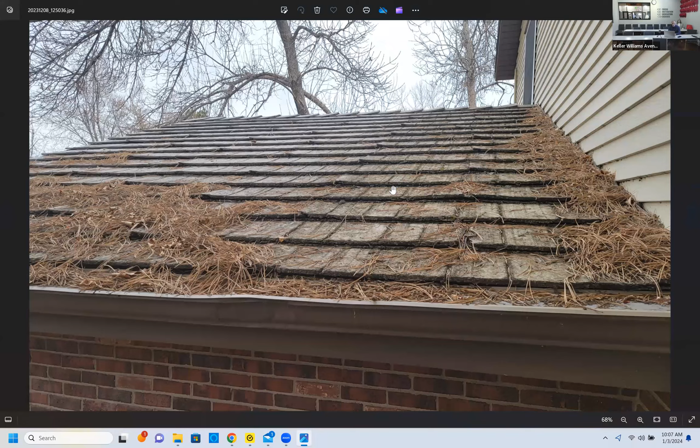This next roofing is actually on a house I'm going to be listing, and it's a type you don't typically see much anymore. It's called Woodruf shingles, and there was a class action lawsuit on this type of roofing years ago. It's a man-made kind of fiber that looks like a wood shake shingle, but you can see moss growing out of it and it's delaminating. It's pretty ugly. This house is going to be sold as is, it's an estate sale, and they didn't do hardly anything to it. You can see the grooves in the shingle, which shows it's a man-made type, not real wood, and it's much more regimented in how it's put on the roof, whereas a real shake shingle is staggered and curling up. This roof is probably 30 years old, if not more.

Hey Bob, would a roofer charge more to remove those two types of roofing than they would a regular shake? Yep, asphalt or shake, absolutely. I don't know what they charge per square, like 10 by 10 feet, but it's definitely more because it's more laborious to take that roofing off, or if there are multiple layers. Shake is always more expensive to take off because there are nails all over the place. On a roof this old, they'll probably have to take it down to the wood and put on new felting, which is the black asphalt roll you see on roofs before shingles go on. But it's definitely seen its day.

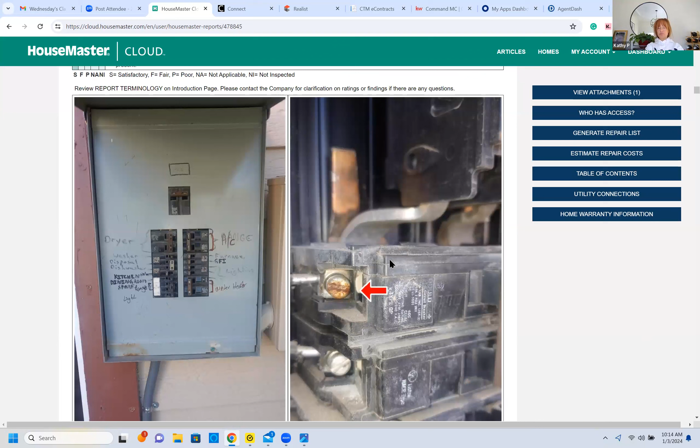I just got a quote on, I guess it's about a 1,500 square foot home, and it was $4,300.

Okay, 43. Hey Bob, would they necessarily replace the whole outside case if they were redoing these, or would they just do the breakers? Can they do just the breakers?

No, they have to do the entire panel. And sometimes they have to put in a new mast.

The mast is the pole up on top that brings the wires. If there's poles bringing the electricity in from a high power line, the mast has to be a certain height up off the ground. In older homes, you'll even find it came in under the roofing, under the eaves of the roof. But it should be a certain height so people can't jump up and grab the line. So yeah, they don't just replace breakers, they replace the whole panel.

And it's a good idea, if you have a 50 or 60 year old panel, you might as well get everything updated and know it's safe.

Now, in this particular one, one thing we did ask for is there was some rust on this breaker, which could cause it to not trip correctly. So we asked an electrician to go through the breakers and make sure everything was functional and replace anything that needed to be, and they replaced 3 of the breakers.

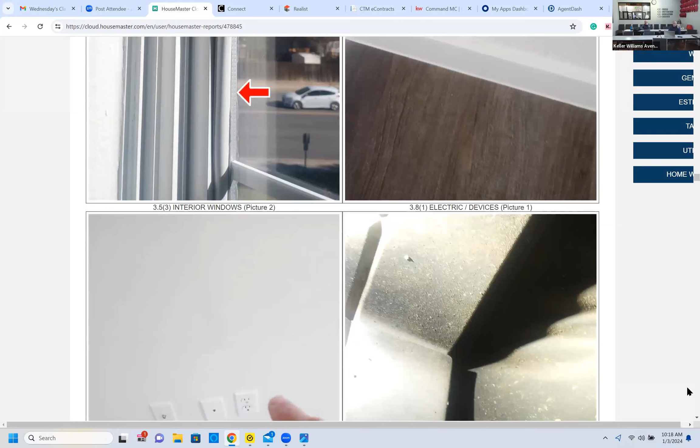Do you know if they allow the GFCI in series? If they're set up in series, does it require not every plug to trip, even though it's in a series? I think it's different with different municipalities, but usually they are in series. Sometimes what's weird about GFCIs is you may have one in the kitchen, and if it trips, it may also trip another one upstairs. I've seen that—I was just in a kitchen where there was one at the end, but it tripped the entire circuit. Yeah, I don't think it's necessarily supposed to, but it can happen, and whether that's okay just depends on the city. Everybody has their own thoughts on that—most electricians will say no, they don't want it tripping the whole thing.

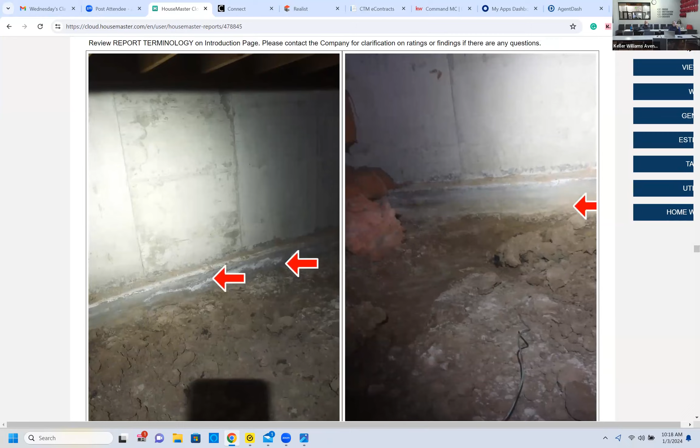This is down in a crawl space, which most of us never see even when we're showing a house. But for your knowledge, if you're in a basement that doesn't have dirt but concrete, and you see this white powdery substance, that's called efflorescence. Efflorescence is caused when moisture breaks down the minerals in the concrete from being moist most of the time. You can see some efflorescence out here in the dirt too. This is pretty common—a lot of times crawl spaces aren't sufficiently dried out and don't have visqueen or plastic down on top of the dirt.

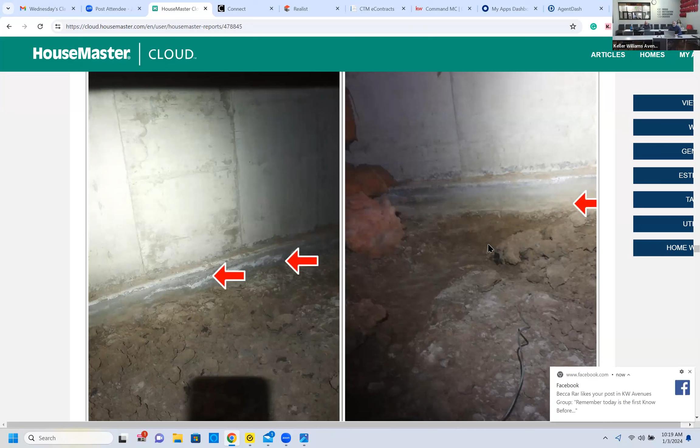So that was one thing they asked for, and the seller did it. The seller was actually an investor, and he was pretty nice about fixing the numerous items we had. There weren't a lot, but yeah, he was good about it.

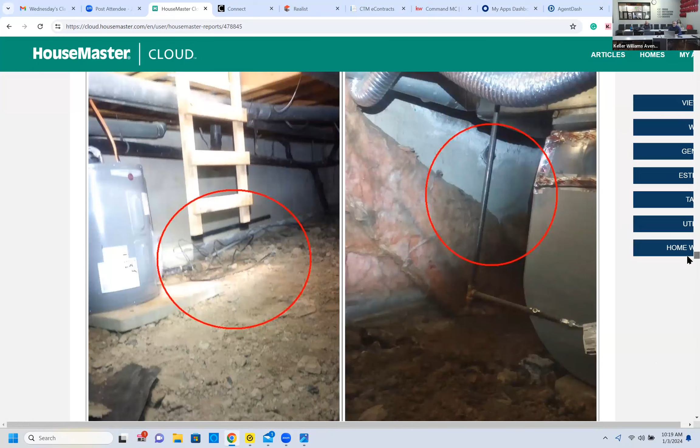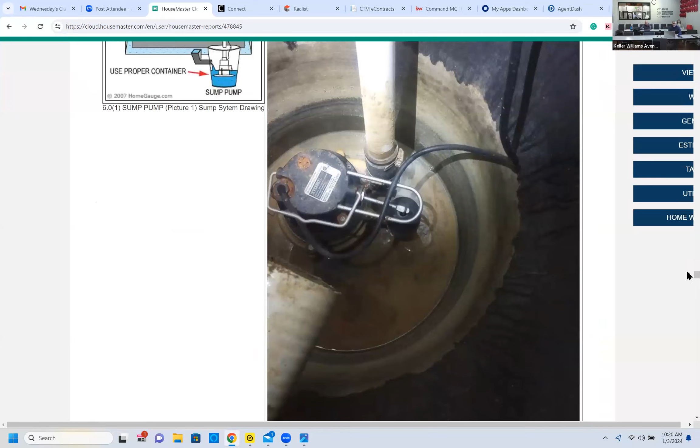We also had a break in the main water line out here that they didn't realize was dripping water—you can kind of see it looks a little different there because it had probably been dripping for a long time. There was also a broken switch going down into the crawl space, not a big deal. Like I said, these are often things you're not going to see because you don't typically go down into the crawl space, do you, Valerie?

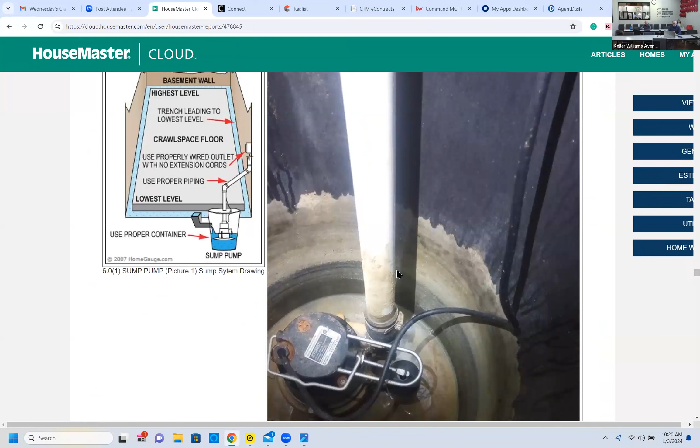No, I don't. So here is a sump pump, or sump pit. What this does is—you have a French drain that goes clear around the whole exterior of the foundation, and it drains towards this pit. If there's a typical amount of moisture that builds up every so often, this pump, which works kind of like a toilet valve, kicks in. Once the water reaches a certain level, it trips the pump, the pump turns on, and then it pumps the water outside.

This line goes up and exits somewhere out the house. Once in a while, you'll find in these sump pits that the seller or somebody has plumbed this exiting water into the water system, which is totally illegal. You can't have this pipe drain into the water system and exit from there, because they don't want this water getting into the public water. It just goes up and outside and exits somewhere, okay?

And if you do have radon, they will oftentimes use this pit, and they'll maybe drill another hole in here and put the pipe down in there and have it go down into the ground for radon mitigation.

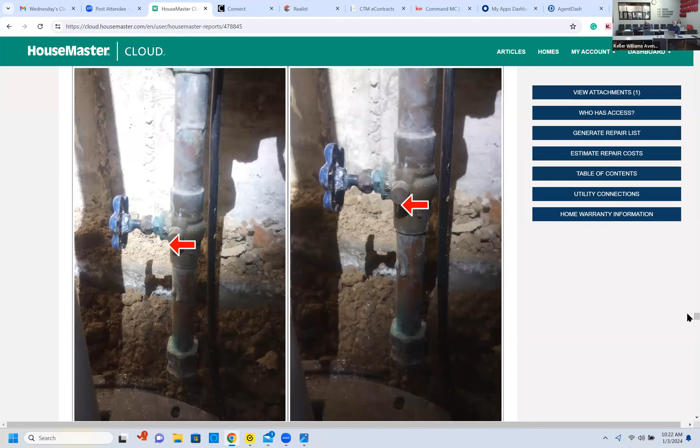The water heater was fine. There were a few connections. This was not connected the way it was supposed to be, which you're not gonna see in a crawl space, but you will in a basement. There was a leak here, which is common. If nothing else, you guys learn a lot of things by going to these inspections and just listening.

Let's see what else we got. I think that's pretty much it.

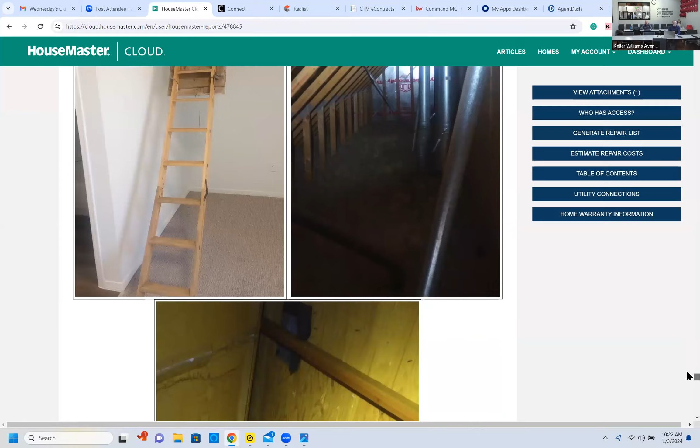Sometimes you might see in a house an open stairway where you can pull down a string and open up the attic access. This is in a two-story condo, which is kind of unusual, but they have the access there. You could actually see the whole area up there. A lot of people say, well, can I store a bunch of stuff up there? You really shouldn't be storing anything heavy. You could put maybe a piece of plywood down on top of the insulation and some light Christmas decorations or whatever, but you don't want to put a bunch of heavy weight on top of the trusses. That's kind of a different thing you don't typically see.

But of course, the inspector will check up in the attic, make sure the insulation depth is good, and make sure there's not been any intrusion by animals, because every so often a raccoon or squirrels get in there and raise havoc.

I once had a house I did in Aurora. We had, we figured somewhere around 15 raccoons that were living up there. And when the inspector opened it up, he about came off his ladder because they came charging at him, which is not fun.

This is a condo sold this year up in Fort Collins. Didn't have a lot of issues, but this is a typical panel inside a condo. It's typically a little smaller. This was not a bad panel. He took a picture of it, and a picture inside the wire. You'll see the name of this panel is Square D, a very good manufacturer of panels. You'll see Square D oftentimes now, as a lot of builders are using Square D panels, so it's a good one. Federal Pacific and Zinsco, again, are not so good.

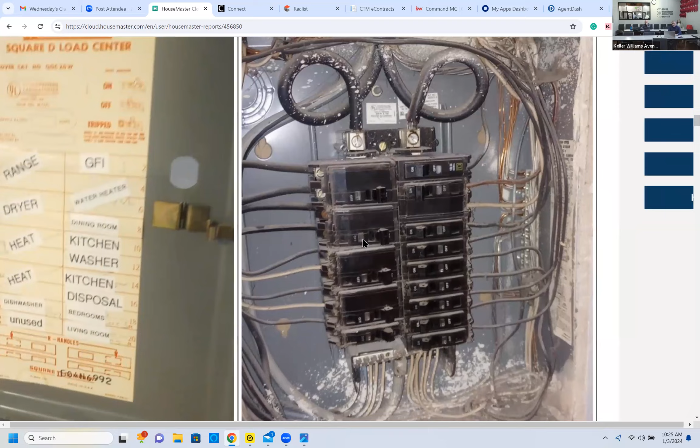So this is typical of what a good panel will look like inside. This is just some excess paint or spackling from when they did it. But you'll notice that the wires are not bent and they're not at a sharp angle, they're kind of looped. A good panel will have more of a curve to the wires when they come in. They try not to bend them at a 90-degree angle, but that's a good panel. You're not going to see that when you show a house because you don't take off the cover, obviously.

This condo did have GFCIs. Actually, this was a very good little unit. Really nothing other than something that's common: when people paint, when they hire somebody, they don't cover the alarms and they'll just spray paint over them, or texture over them. And immediately there's moisture in there and they're not going to function correctly.

So if you're showing houses and you see that - I showed a house a couple months ago in Littleton, 950,000, it was a fix and flip, and every single one of the smoke alarms and CO alarms were spray painted. Which is just unbelievable to me. They probably put 150,000 into the house and didn't do anything about putting in new smoke detector alarms, and people still bought it.

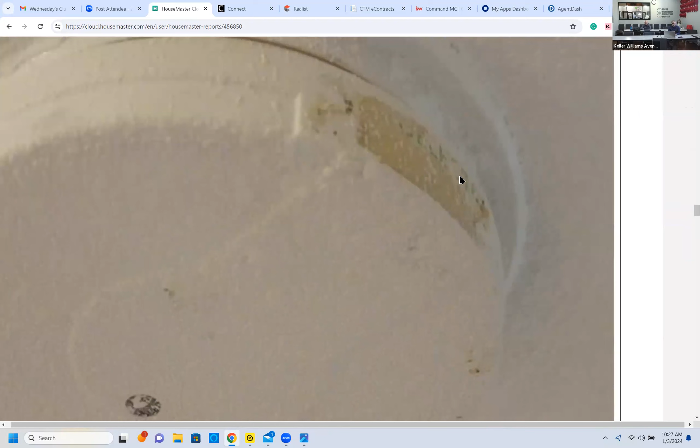Another thing to note when you're walking through - have you ever noticed that the alarms are maybe yellowish in color? That's a very good indication that they're older. You can kind of see in this one, where they didn't spray paint, it's a little bit yellowish looking, and this is an older alarm. So my people were just glad to get this one, and they said we'll put in new alarms and do everything. The only thing they asked for was a credit on the fireplace.

So when you have a wood burning fireplace, a lot of times you want to make darn sure that they do inspect the fireplace, and you may want to hire separately from the inspector - you may want to hire a chimney sweep or a company that looks at the flue and makes sure everything is solid up through there. I know up in Evergreen, like where Valerie is, there's a lot of fireplaces, and you really want to make sure if people are using the fireplaces a lot, that you get it looked at. They can put cameras down in the chimney and inspect them and make sure you have a safe fireplace.

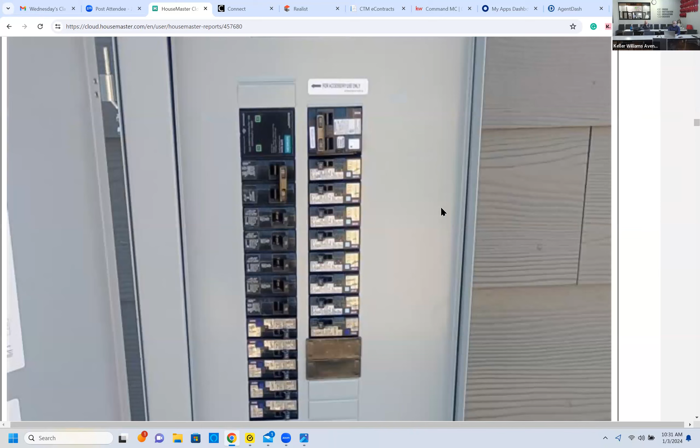There's a newer panel, obviously brand new, much larger. And when you get into newer homes, you'll see they not only have breakers, they also have these little switches for arc fault. So in bedrooms, and now pretty much every room, they have arc fault breakers, which means if something just sparks in an outlet, it will trip the breaker. A normal breaker wouldn't trip from a little bit of a shock inside a pan, plug, or light switch, but with the arc fault, it will trip and shut it down immediately.

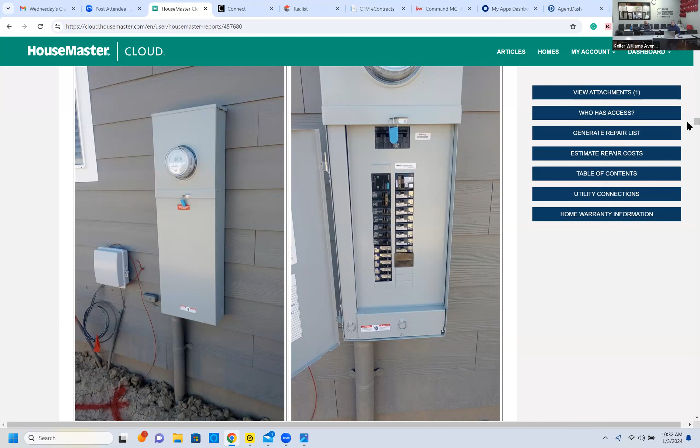It used to be that was only required in bedrooms, now it's pretty much every room. It's a total pain in the butt. Why? Do you have a problem? Like a vacuum cleaner or blender, you name it, it'll set them off. Maybe you're just using too much electricity.

There was a light switch that wasn't working correctly, so they replaced it. Like I said, I think there were 8 things he found with this home that we probably wouldn't have found had we not had an inspection, if we'd just done a walkthrough.

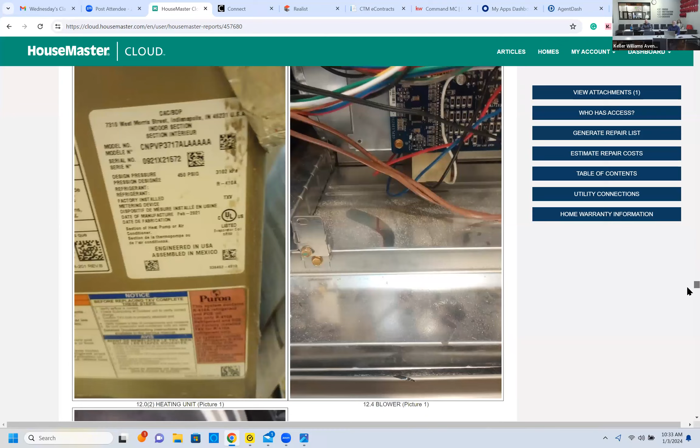But it's also good for the buyer because they have this inspection report they can go back to. The inspector explains things to them, and then they get explanation a second time from the builder when they do their walkthrough prior to closing, typically a week before. It just shows everything and gives them good information.

Okay, let's go to another one. Any questions on anything so far, you guys? No? Is that because I'm doing a great job, or because you already know it all? You know it all, come on.

Let's go. Oh, this will be a good one, because my people actually backed out of this one, and I'll show you the main reason why. My old partner used to live in this patio home right next door, so he thought it was interesting that I was showing and had this place under contract, but like I said, we didn't go through with it.

These have roof tiles on them. This is an older patio home complex right over by Indian Tree Golf Course, around 78th and Wadsworth on the west side. But the roofing looks pretty good.

This is something you guys should notice when showing or listing a house: these old-fashioned splash blocks are pretty much worthless, and most people don't even have them positioned so that water from the downspout hits and gets exited out. These are typically only about 3 feet long. This needs to be like a 6-foot extension to get it away from the edge of the house. Sometimes people will try to trick you and put on extensions right before they list the house, but you'll see sunken soils all the way around and know they've had nothing there, or just one of these splash blocks, for many years, especially in older homes. You don't find these anymore.

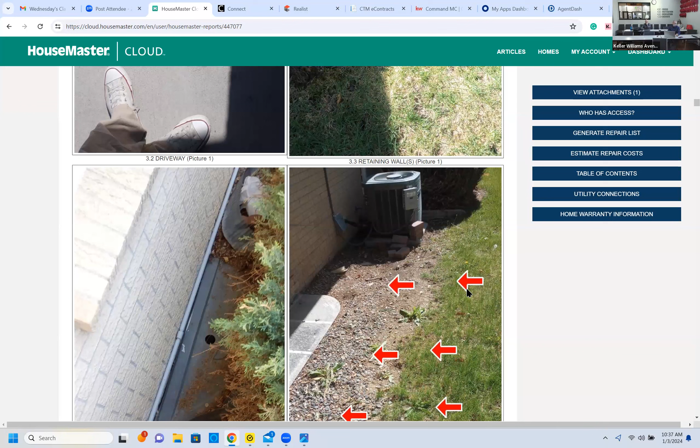In a good market or a strong seller's market, if you ask the seller to make this a positive grade, they'll tell you no. It's something I point out to buyers when showing a house, that this is probably something they'll want to fix. You want roughly 1 inch of grade for every 2 feet or so, just so the water flows away. With new homes now, they always build so there's positive drainage away from the foundation, and you can't interrupt that drainage at all or you'll void your warranty on the foundation.

Somewhat of a newer panel, I can't remember. No, this was not newer, but it's a General Electric. It's a big panel, and you can see that the wiring was all pretty good.

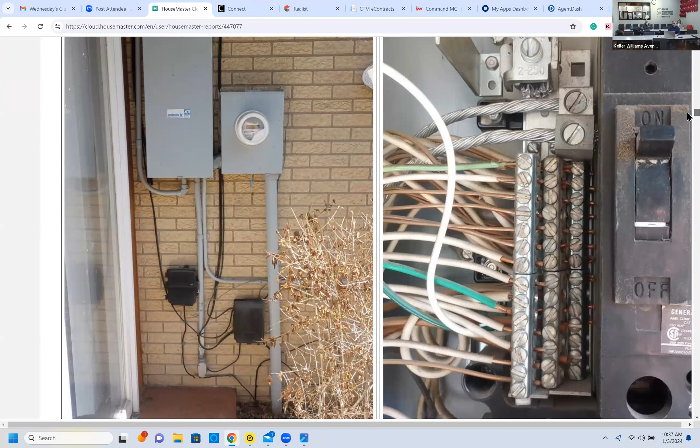Nothing they call double tap. Once in a while, your inspector will see maybe two wires come into the same screw, and that's called double tapping. But you're not going to see that unless you open up the panel, which I wouldn't suggest you do when you're looking at houses, because you don't want to cause any problems.

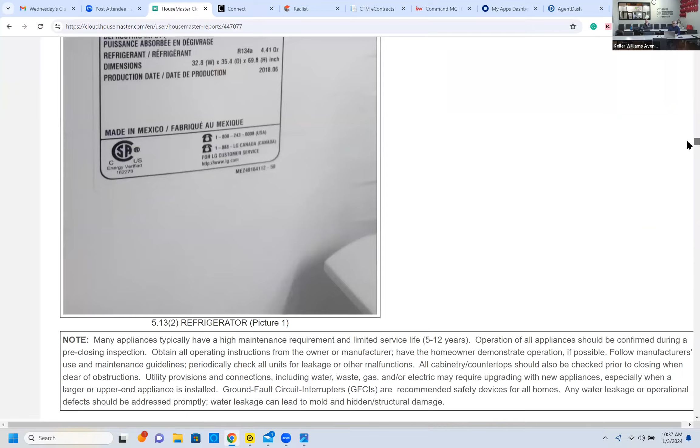Let's go further down here, let's see. It's coming, I know it is.

Nothing wrong there. Okay, this was a problem. This is why my buyer just got out of the deal. This is a support beam—you can see this big beam here, and this support beam underneath it is crooked. And we plumbed it, and it's that much off. That's two inches; they allow up to a half inch. This was quite a bit, and you could not see the other two beams in the house, but chances are they were off too.

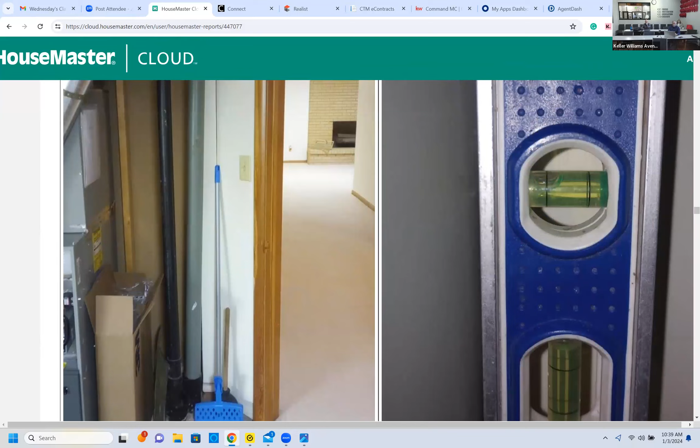Now, do I think that was a big deal? Somewhat, because yes, it's crooked, and this beam is not straight up and down like it should be. They were not comfortable with it. They did not even want to pursue having the seller try to remediate that, which they probably wouldn't have. But that was their just cause to get out of the contract, and they did.

Which some people say is silly. They didn't feel it was silly. I talked to my structural engineer, sent him the photos, and he said it's definitely a problem and you'd probably want to get that fixed over a period of time if they didn't fix it. He said it could run anywhere from $3,000 to $10,000 to get that taken care of. So just another thing—in the 30-plus years I've done this, that's the first time I've seen these support poles

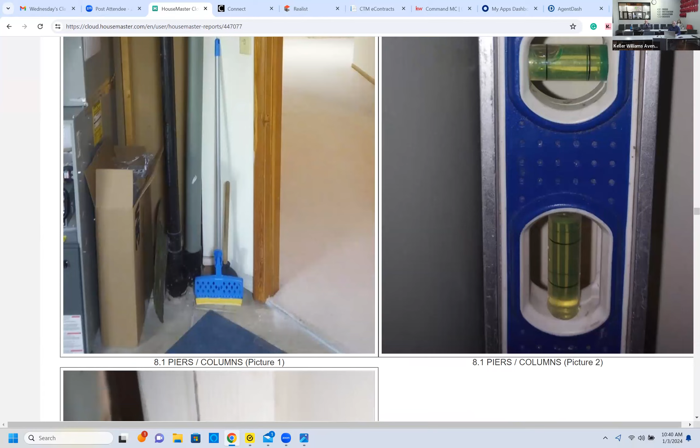that far off. What do they have to do to fix that? I don't know exactly—you'd probably have to take that pole out and reinsert it, and that's going to take some work. It depends on how far off, because there's another pole, or two, on the other side of this picture, and one more we couldn't see behind us. So it's just according.

Something to notice when you're looking at a house—this is a good idea just for around your own house too. Do you know what this is on a hot water heater? It's a pressure relief valve.

There should be either a copper or plastic pipe down within an inch or so of the ground. What this is for is if enough pressure builds up in the hot water heater that it has to release, it will release scalding hot water out of there. Once in a while you'll see them without these pipes on there.

And if you happen to be in the wrong place at the wrong time, that will burn the hell out of you. This little valve here you can lift up to release the pressure, but what it should allow is that if something comes out, it just exits down, and it should be next to a drain down in the basement floor, which this was.

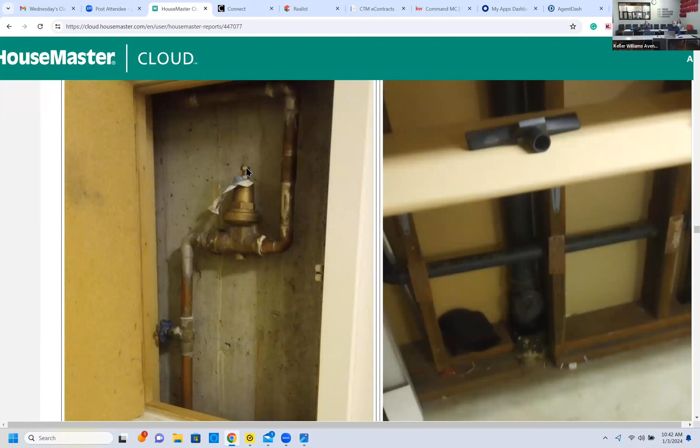This is your leaded pipe for gas. This is your shut off here for the gas, notice it's in line. They're going to look at all these connections in an inspection and make sure they're legal to use. Sometimes people put in stuff they shouldn't be using because they do the plumbing themselves—copper pipe, yes, but sometimes they'll put in plastic. This is your main shut off, and this is your pressure valve inside the house.

In older homes, you're going to find, like this one, that they didn't always float the walls on the concrete floor. This part is floated a little bit—by floating, I mean they have a 2x4 or 2x6 elevated off the ground, with another one above it. The reason they build walls that way is so the ground can shift some without pushing on that 2x4 and pushing the walls upstairs.

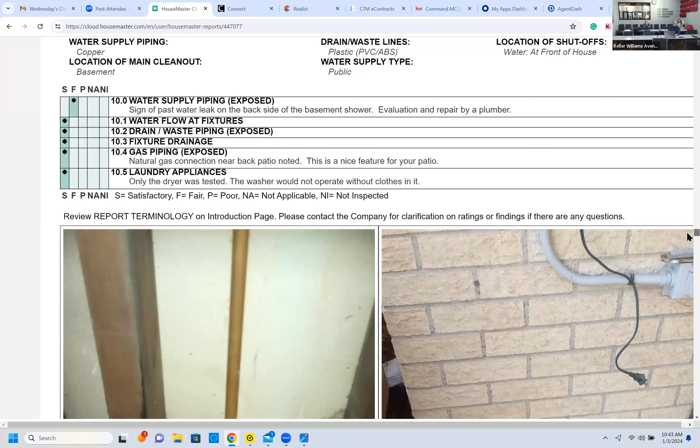In older homes, even though they didn't do a soil sample for every single lot, they poured concrete and were very good at what they did. Even the old Perl-Mack homes up in Northglenn or South Glen, they did a great job typically pouring concrete and not having issues with moving soils like they do nowadays. We're building in areas, especially along 470 on the east and west side down towards Ken Caryl, where there's some really bad soils, and other areas right around our office here.

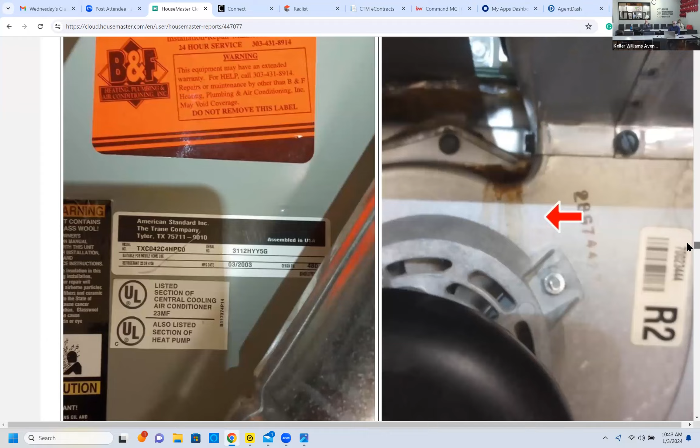Newer furnace. A little bit of rust showed up there, not a big deal, but they're going to point out everything to you.

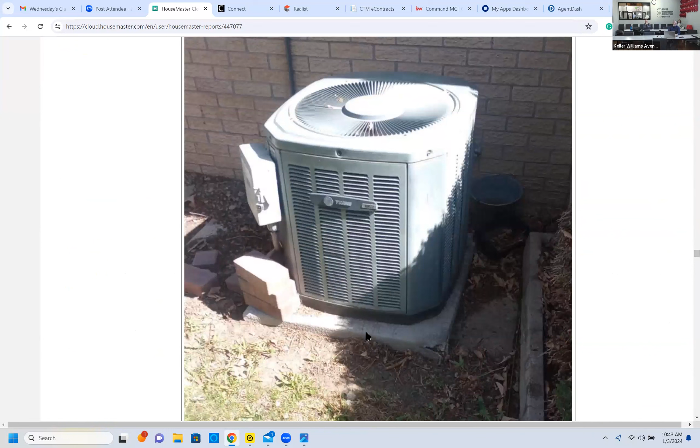Your air conditioner should be on some kind of level ground, or should have something like this, I think it's made out of fiberglass, that you typically set the air conditioner on. I've seen air conditioners tilted at like a 30-degree angle, which obviously isn't going to allow it to operate in an efficient manner, to say the least. So it's just something you look at.

Then you can look at the floors and make sure everything is looking good. One thing an inspector is always going to verify, and I don't think they have a picture here.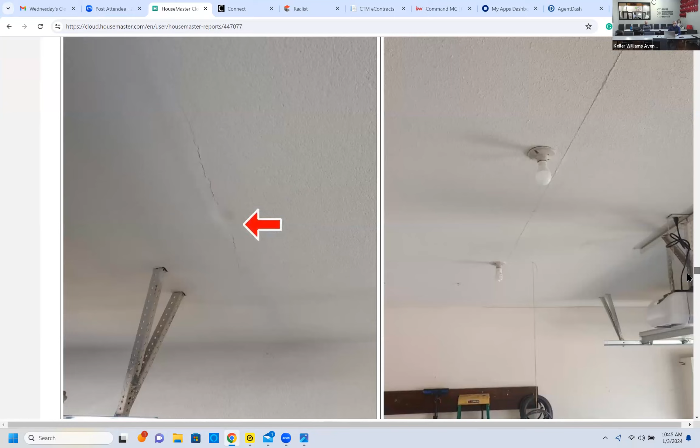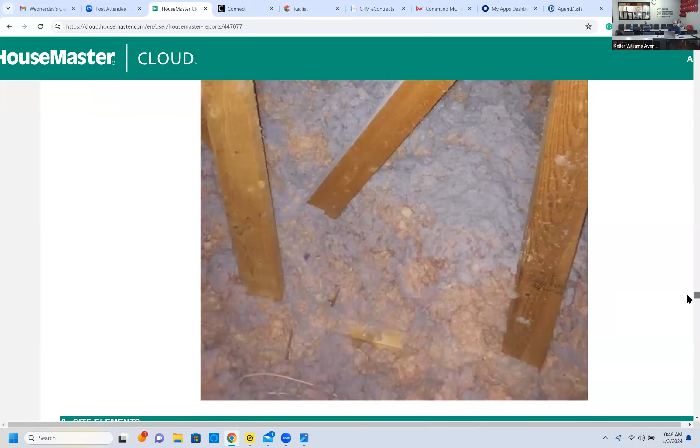Up in the attic, good insulation. He's pointing out again that the concrete extensions don't do much, bad soil. So, any questions on anything on that one?

Is this helping you to learn some of this stuff? Yes. Okay, good. Yes, definitely. What was that? Definitely. Oh good. Let's see. Yeah, that's definitely helping. Good.

Here's a house I sold to a veteran about a year ago. A veteran lived there, and unbelievably this house had one smoke detector in the whole house and no CO detector.

So we ended up asking for those, which they were reluctant about, but they did it. I was like, really, you're reluctant? By law you have to have the CO detectors for sure. I had the same thing happen with that other one I just had. They would refuse to replace them. Really? Yeah. Whatever, yeah. Yeah, people get sneaky.

This house really didn't have a lot, but one thing it did have was a second chimney that was for the basement. They had just sealed it off because they never wanted to build another fireplace, which you could. But that's something that can be a problem.

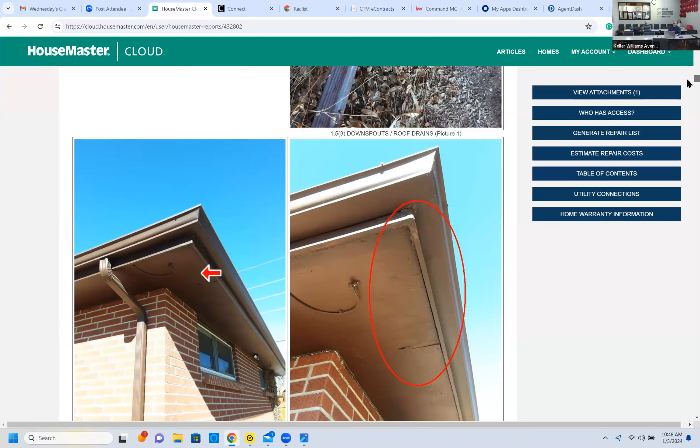This is drainage, obviously. This separates a little bit here, which can cause water to spill. Not a huge deal, but it's just stuff you can point out. This shows there was probably a leak in this gutter system and it was dripping out. If you have a bad leak in the gutters, a lot of times the fascia board and the soffit board underneath will become stained, or may hang down, or may just fall apart. It offers a way for critters to get up in there and be an issue.

Here's the mast I was talking about for the electrical panels. Sometimes the mast may only come up a couple feet from the old service, or sometimes the wire used to come in underneath the soffit, which isn't allowed anymore because somebody can reach up and grab that line, which will give them a rude awakening.

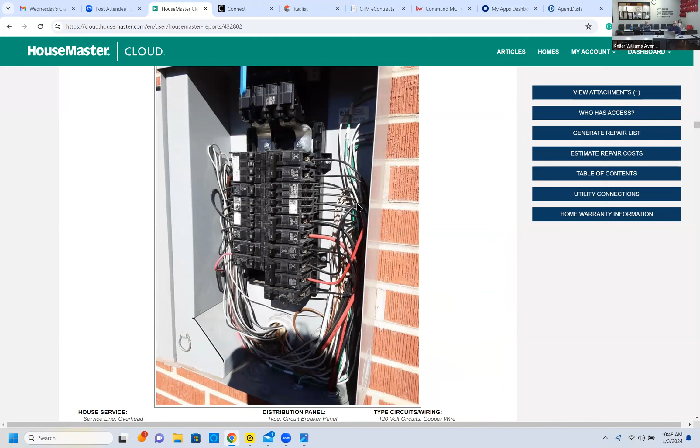Another good panel of wiring, and you'll notice how the wire's looped, it's not squared off. No issues there at all.

One thing you see quite a bit is people replacing their garbage disposal without knowing what they're doing, and they may plumb it incorrectly. It can sometimes cause water to back up and go into the dishwasher area. This one was a little bit off, not bad, but he pointed that out to them.

No real problems here, so we'll go on to another house, because I try to only sell homes that are in good shape, but you don't always, right?

4th Street, Johnstown. This one is a good one to view because we did have some issues here in the basement. This was an older veteran. I sold him and his wife a house up in Johnstown this year.

Now, remember I was talking about that first roofing I showed you that was in awful shape and didn't have vents? These are what you call turtle vents. They should be on the roofing, roughly one for every 150 square feet or so of attic space. They allow the attic to be vented and cooled off so the roofing doesn't bake from underneath and start curling like that first roofing I showed you.

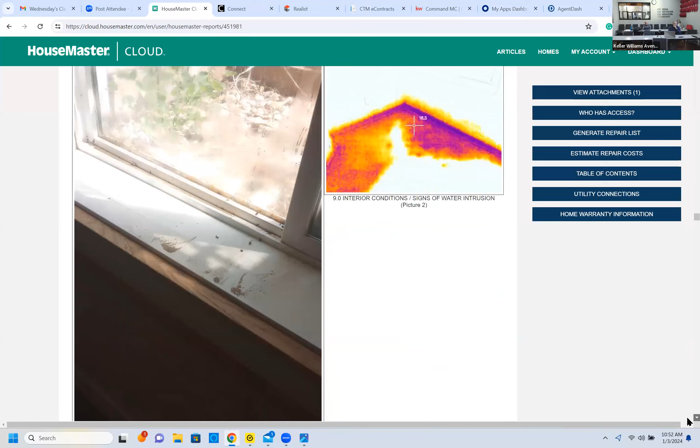So this is downstairs on the south side. I noticed this window was fogged up, and then I noticed sand here. Water had infiltrated through this window well and a couple other window wells. Well, where there's water, there's moisture, and where there's moisture, there can be mold. So when we put a moisture meter on this part of the carpet, you can kind of see the line of moisture—this was soaking wet. You wouldn't necessarily think that, but it was all the way wet and around into this closet.

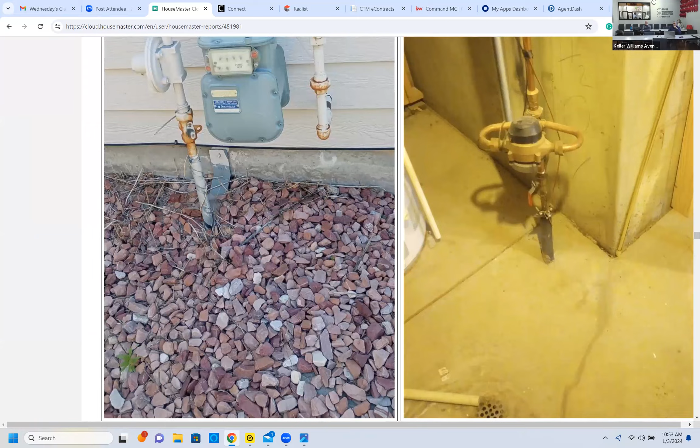And I don't think I have any more pictures. No, I don't. But—any foundation issues yet? No, there were no foundation issues that we could tell by any means.

But this also is a family room on the other side of this bedroom wall, and there's two more window wells out there. Both window wells had flowed over into the family room and into this bedroom. So they had to pull back the carpet, dry it out, reattach it, measure to make sure there was no mold, and clean it up. It cost the seller probably another $4,000. We also asked for some monies—my people were paying cash, but they asked for a credit of $5,000 so they could get custom window well covers made for those big window wells.

Now, these were on the south side, and that can be a fairly common area. When they're that big, you're going to collect water no matter what side of the house they're on. But the sides you really want to pay attention to are the north and west sides, because most of our storms come from the northwest. And when you get into window wells, anywhere, any size, they're going to have a tendency to collect water. Some window wells in newer homes have drains in them, some do not.

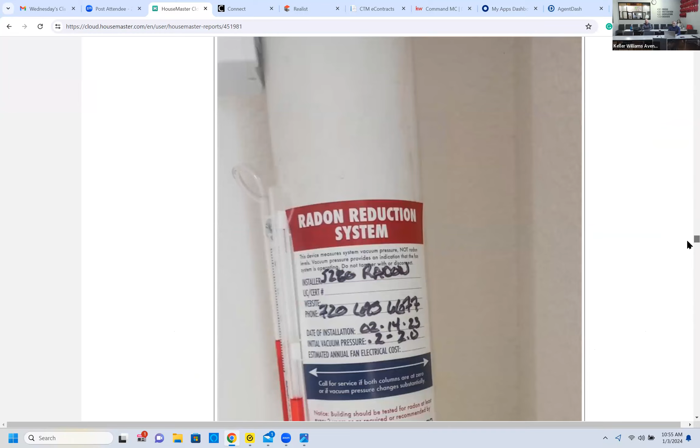So we made sure to make the listing agent aware, and she was going up to check the house after every rainstorm to make sure there was nothing else happening and to make sure we were okay. Radon mitigation system. Nothing else was really a factor in this house, other than that potential issue with water intruding into the house.

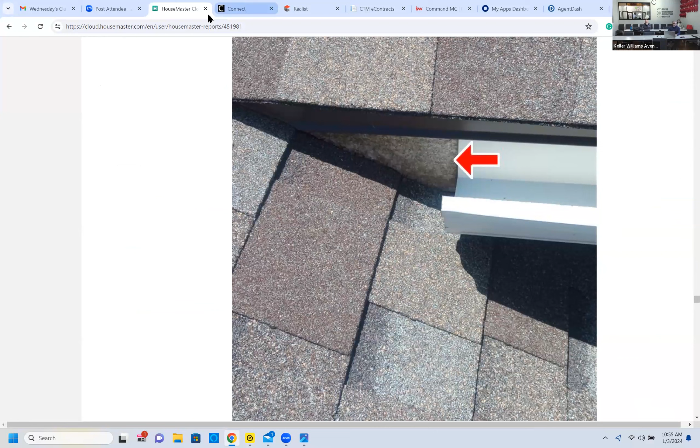That's enough to give you an idea. And like I said at the beginning, I know Valerie's not on this anymore. I go to every inspection for two reasons. I want to learn - yes, I'm old and I still want to learn. And I want to make sure my clients are comfortable when the inspector says we've got a problem here, here's an issue, and help them understand what the inspector is trying to tell them, and what could be a cure, and what could be a potential we want to ask the seller to fix, and make them feel comfortable. I don't want to send them off and have them come back and go, oh my God, Bob, that house is a disaster. Well, hopefully you see enough when showing the house to know it's maybe not a disaster, or that there are potential issues that could come up in the inspection that we want to point out to the seller to fix. But going to inspections, you learn a tremendous amount about houses.

Whether it's a resale or a new home, you're going to learn something. Promise you, right? Kathy's been in the business now, what, 8 years or so, Kathy? And I know you've learned a tremendous amount.

Absolutely. I think it's important that when you go to these inspections, you don't act like you're the inspector. You're just there to learn and keep your clients from maybe freaking out or reacting.